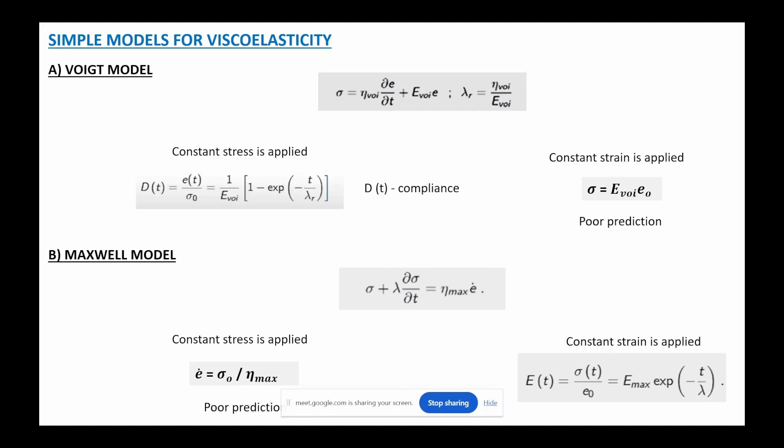So this was what was discussed till the last session. In today's live interaction session, we do discuss the viscoelastic response of the polymer, but here we come with a different perspective. If you see, the week 8 live interaction session has around 8 different lectures.

So today we will have more of a discussion towards understanding the testing of the polymers, or you can say the commercial trade test in the polymers, then the properties of the blends. We discussed blends in week 6 of the course, so we try to add more understanding towards the properties of the blend. Then we discuss the biomimetic properties of the polymer, and then we conclude with the diffusion of polymers.

So the trade test of the polymers is something very specific towards the application of the material, or of the polymer. It determines whether the particular product that we fabricate is suitable for commercial application. Typically speaking, it's a kind of quality testing to check whether the product is good for a commercial purpose. To check the commercial feasibility of a particular product, we do this trade test.

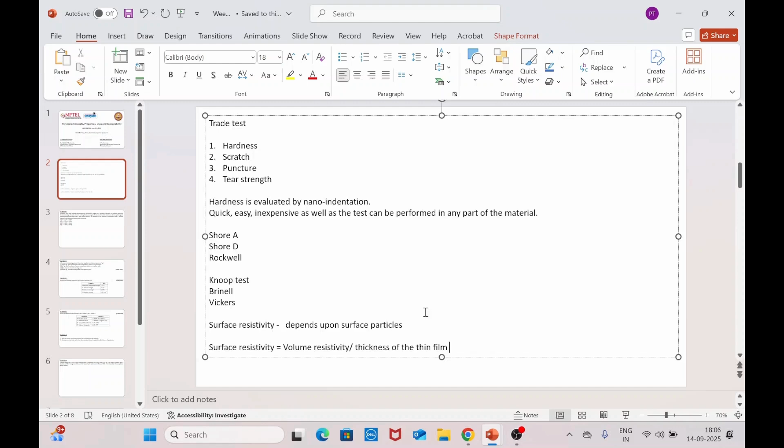So due to the chemical potential gradient, there is a migration of the molecules from one region to the other region, from high to low regions of chemical potential. This diffusion is usually governed by a law called Fick's law. Over there we try to relate the mass flux in terms of the concentration gradient and the diffusivity. So let me just write that also.

So J, which is nothing but mass flux, is minus D, where D is your diffusivity, times ∂C/∂x. This is your concentration gradient, the change in the concentration. The negative sign represents that the movement is from the high concentration region to the low concentration region. So higher the concentration gradient, higher is going to be the mass flux.

The diffusion of the molecules typically varies depending upon whether the diffusing medium is a gas, liquid or a solid. We can understand this difference easily, because in the case of gas, the molecules are easily able to move. That is the reason it is easier for the molecules to diffuse in the gas compared to the liquid, compared to the solids, because in solids the atoms are arranged in an orderly fashion. They are very close to each other, so the atomic movement is very much restricted. That is the reason diffusion is very slow in the case of solids.

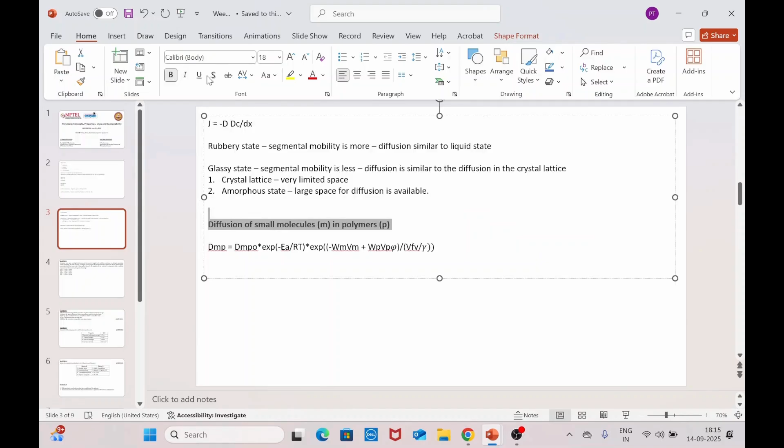So again, as I keep saying, this is only a very brief overview, or a gist of what was actually discussed in the course. So it's my request for everyone to go through the lectures so that you can have a better understanding of the concepts.

Our discussion ends here. After this, we will start to solve a few numerical problems related to what we discussed in the previous class, as well as today's class. Before proceeding to that, if you have any doubts, feel free to ask. Today's discussion is more concept oriented or theoretical. We do not have many problems to solve based on it. So if you have any doubts related to what we have discussed so far, you are welcome to ask.

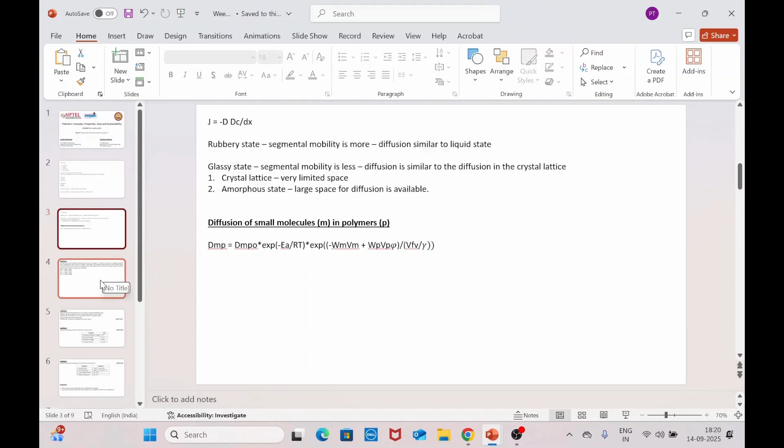So the first question for today's session is about a copper wire upon loading. We should have solved this question in the last session itself, but due to time constraint we were unable to, so I have taken it up today. The question reads like this: a copper wire upon loading. So you are going to load a copper wire.

Its length is going to instantaneously increase to a length L, and then continues to elongate gradually. Upon unloading, the wire retracts to its length L. Once you apply the load, it elongates gradually, and once you unload it, the wire retracts back. According to the Maxwell model, which one of the following options correlates the total strain, applied stress, modulus, material resistance to flow, that is viscosity eta, and the elapsed time between loading and unloading?

So how do you proceed to solve this? If anyone has solved this from the last live interaction session, then you are welcome to share your answer. If not, then please take this time to solve this.

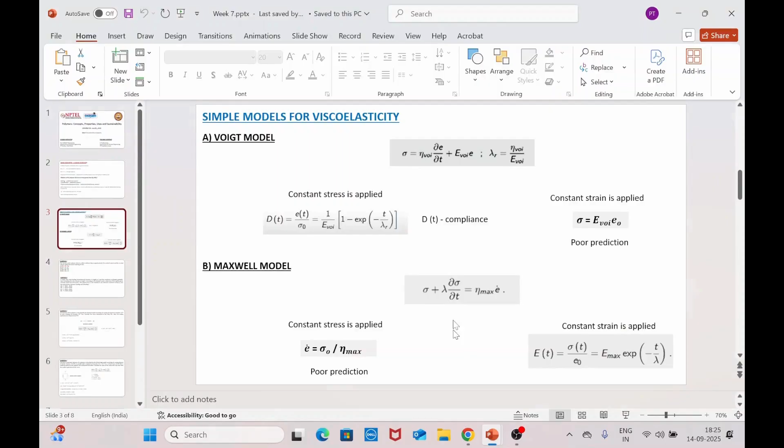So let me copy this. Anyone? Any idea on how to solve this question? Anyone with any answer?

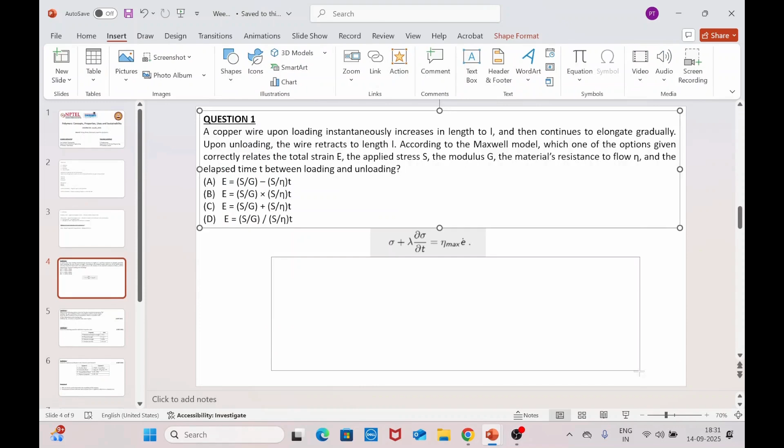So if you just apply it in this equation, let's check. So stress will be S plus, this is nothing but eta by G.

So if we represent it this way, then if we express E, then we will get S T by eta plus S by G.

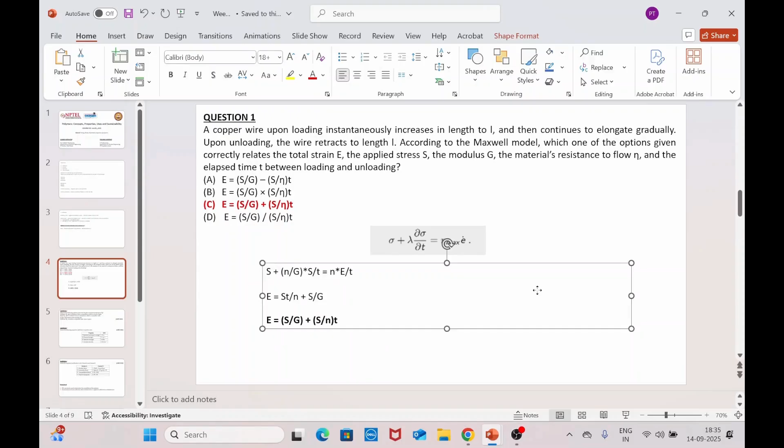Is there any doubt related to solving this question? This was quite a simple one, except for the fact that we need to know the fundamental equations of both the Voigt model and the Maxwell model. If we know them, solving these questions will be relatively very easy.

If you have any doubts, you are welcome to ask me. And the reason why we did not give d sigma by dt, the differential change in the stress, is because the applied stress here is a constant stress.

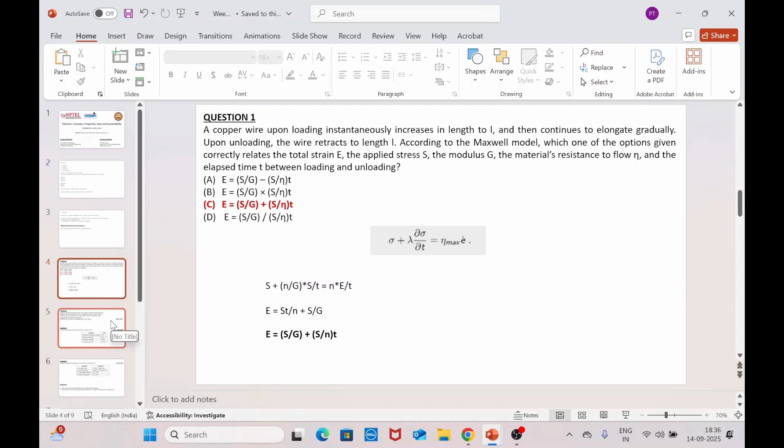So let's move on to the next question. It's a true or false question. We are asked which of the following options is or are true about glass transition temperature Tg.

The options are: above Tg, the glass transforms from an amorphous solid to a viscous liquid. At Tg, glass transforms from an amorphous solid to a crystalline solid. Tg is dependent on the heating rate. Below Tg, nucleation and growth take place in glass. So which of the following options is true?

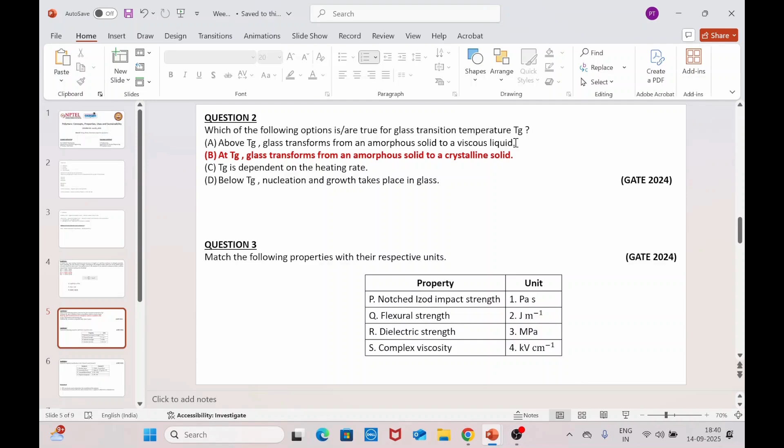So option A is the correct one. Above Tg, the amorphous solid gets converted to a viscous liquid. This is basically the definition of Tg. Tg is the temperature where the polymer goes from its glassy state to rubbery state, or it basically starts to show the ability to flow.

So that means it moves from an amorphous solid to a viscous liquid. The other two: Tg is dependent on the heating rate, and below Tg, nucleation and growth take place. What do you think about these two options? Does it mean that Tg is independent of the heating rate? So think about these two options.

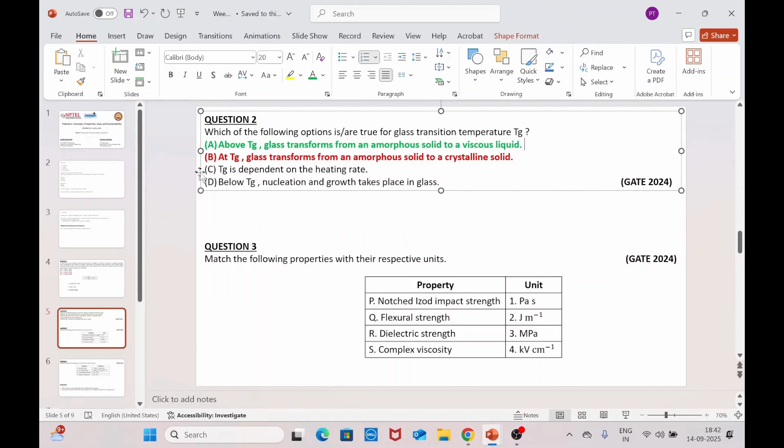Let's go to the next question. Match the following properties with their respective units. We have four: notched Izod impact strength, flexural strength, dielectric strength, and complex viscosity. So we are supposed to match. What should be the right match?

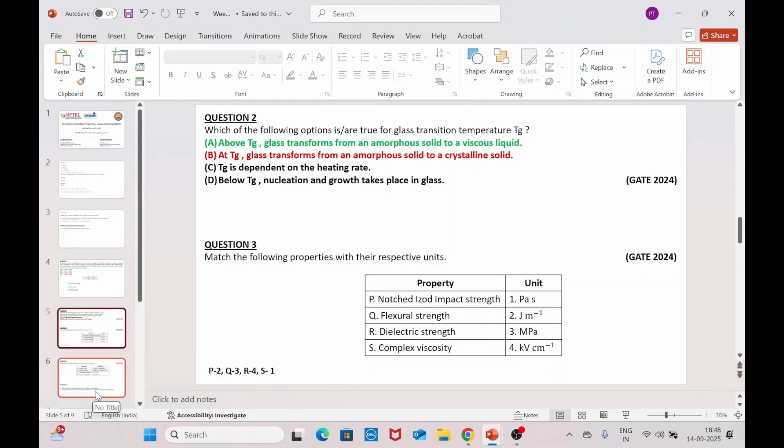So moving towards our next question, let's do the true or false before the match the following. There are two questions here that you need to answer whether they are true or false. The first question is, DSC can also be used to determine the crystallinity of the polymer. Is it true or is it false? This we discussed in the last live interaction session also.

So one of the ways to determine crystallinity in case of a polymer or any other material is using X-ray diffraction. Depending upon the type of diffraction pattern that we obtain, we can comment about the crystallinity of the sample, what type of crystalline nature it is, and we can also comment about the percentage crystallinity present in that kind of material. But here the question is whether differential scanning calorimetry can also be used to determine the crystallinity of the sample. Is it true or is it false? Then justify, of course.

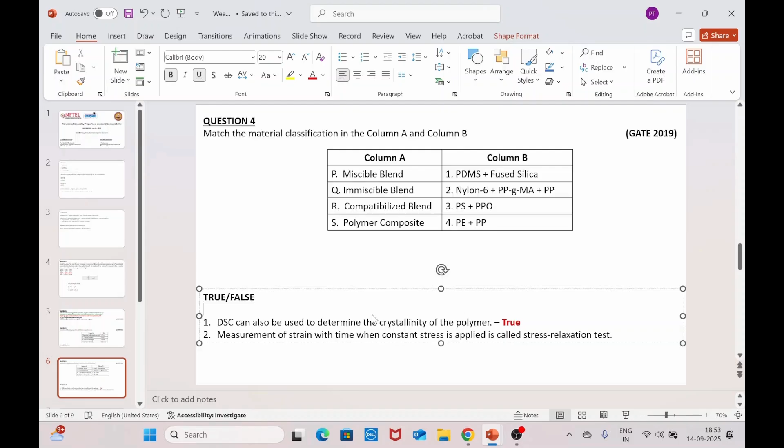So, the measurement of strain with time when constant stress is applied is called stress relaxation test. This is false, right? Because stress relaxation test is measurement of stress with time when constant strain is applied. But here the definition is that strain is measured with time, keeping the stress constant. So that will be the definition of creep test. Is that okay? I hope everyone knows the definition. So this is false, right? I hope things are clear with respect to true or false.

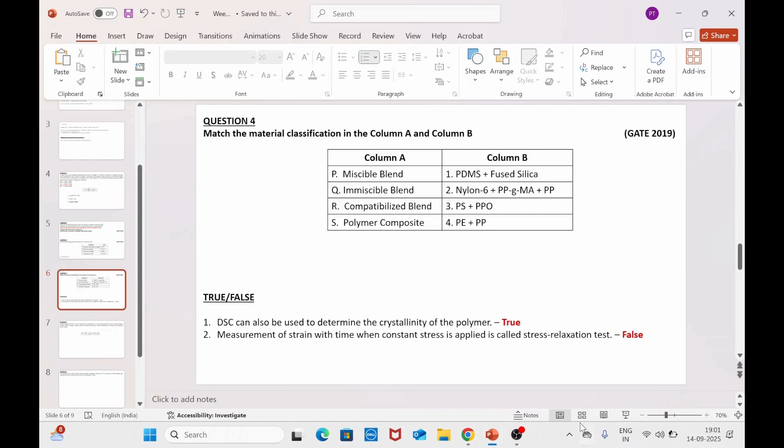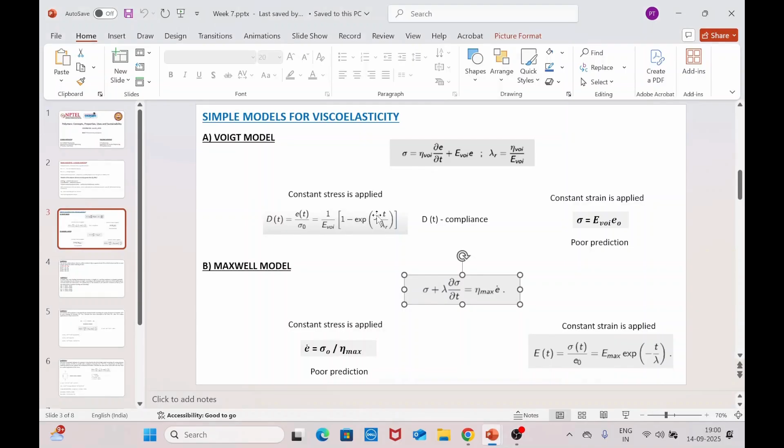So how to calculate the compliance of the sample? So compliance, if you remember, it's something that we discussed in last class, which is usually represented by D. So, this we discussed in the last session. I'm just going to give you the formula here.

So here if you see, the stress is constant 10 kilonewtons, so the strain is going to vary. So that is the reason why it is called as creep.

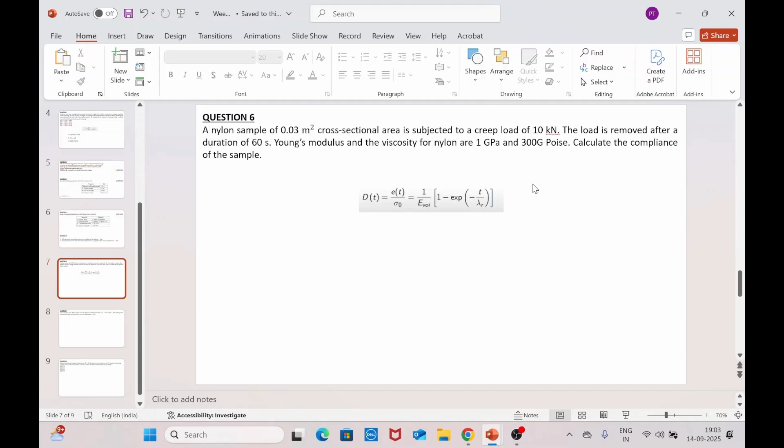Lambda is the relaxation time. T here is 60 seconds. So now we are supposed to calculate the value of lambda, which is the relaxation time. So has anyone calculated the value of lambda relaxation time? So relaxation time is nothing but the ratio of the viscosity to the Young's modulus.

So viscosity here is given in terms of gigapoise. So we need to convert gigapoise to poise, and then from poise we need to convert that into Pascal second. So 300 gigapoise is nothing but 300 times 10 to the power 9 poise. Now from poise to Pascal second, we need to multiply that with 0.1. This entire divided by the Young's modulus, which is given in the question, 10 power 9.

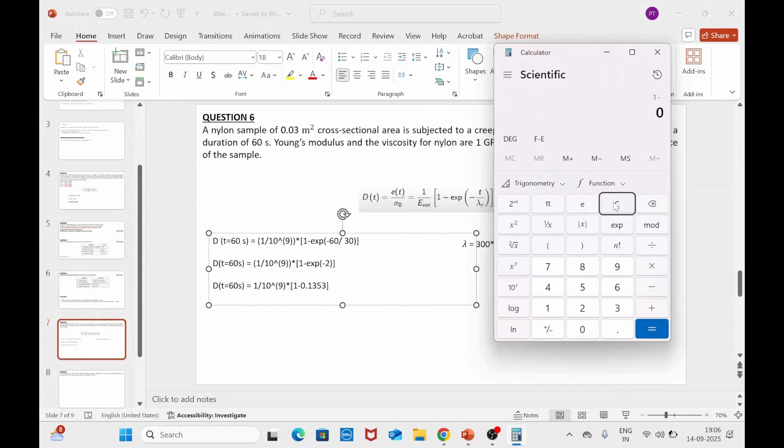So then compliance at t equal to 60 seconds is going to be, let me take the calculator once again. 0.1353. So 1 by 10 power 9 times 1 minus 0.1353, which is 0.8647.

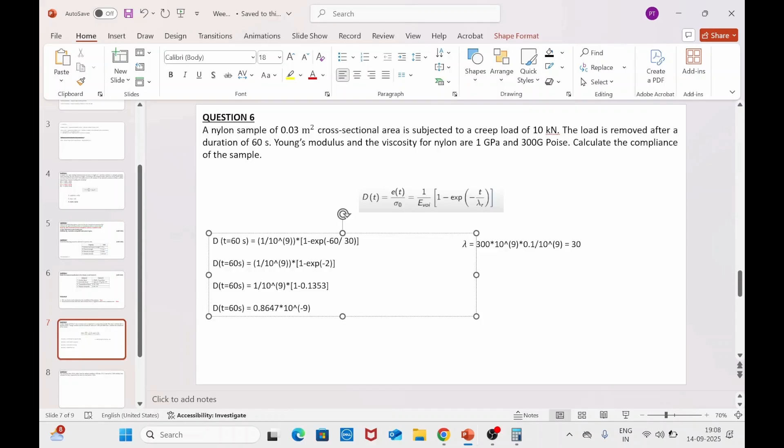So compliance after 60 seconds is going to be 0.8647 times 10 to the power minus 9. Is the answer correct, or do you guys have any other different answer? Anyone with any other different answer?

So what will be the units? Since compliance is 1 by elastic modulus, it is going to be 1 by Newton per meter square, or meter square per Newton. So this is the value of the compliance of the sample after t equals to 60 seconds.

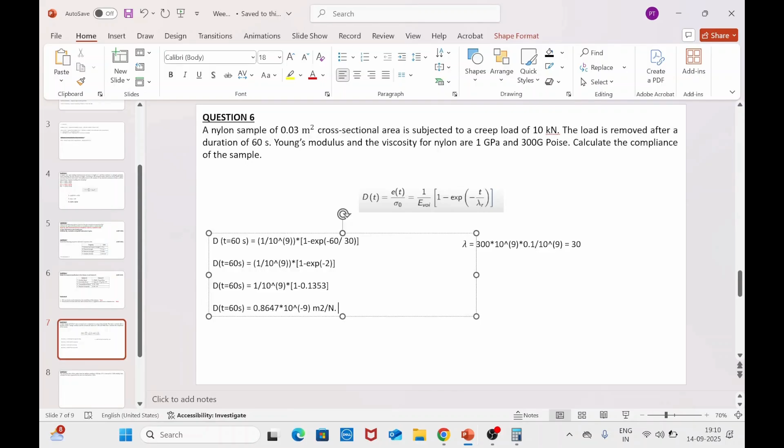And one more thing here is, since we don't know which model to use, I have calculated the compliance using the Kelvin-Voigt model. But here you can also use Maxwell's model to calculate the compliance. So you can take that as a task to calculate the compliance value using the other models also. Let us discuss whether there is any contrasting difference in the answer in the next live interaction session.